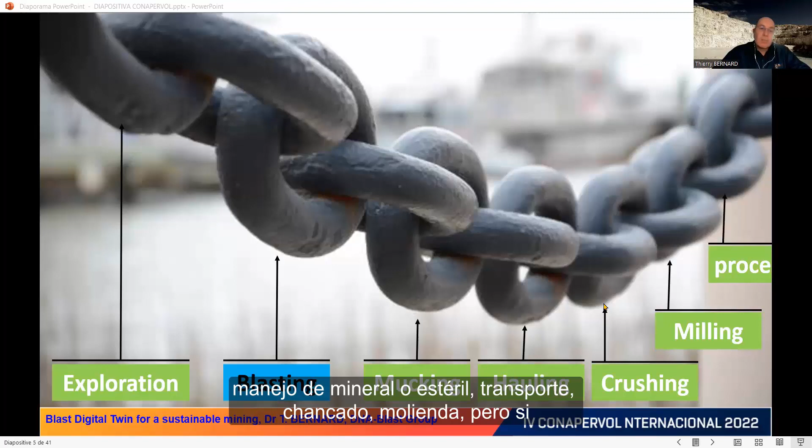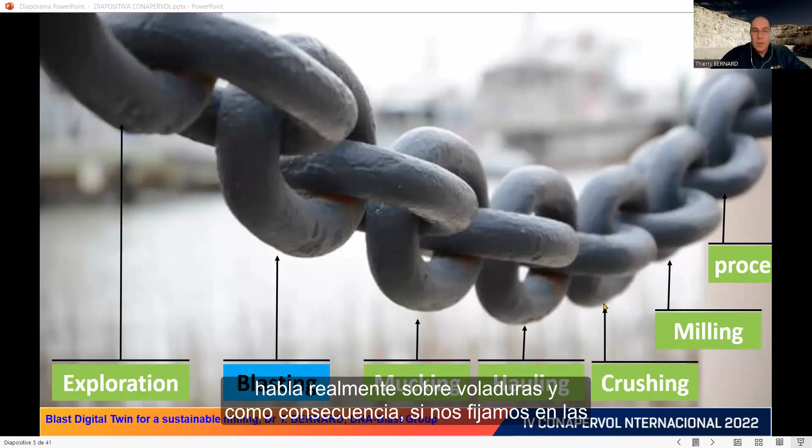If you look at the global chain, it starts from exploration, and then you've got mucking, hauling, crushing, milling, processing. But if you look at blasting, that is the first link of the chain. Nobody really speaks about blasting, and consequently, if we look at the trends, there's no reason the trends will not be the same for the blasting industry. It has to be sustainable and supported by digital technology and automation.

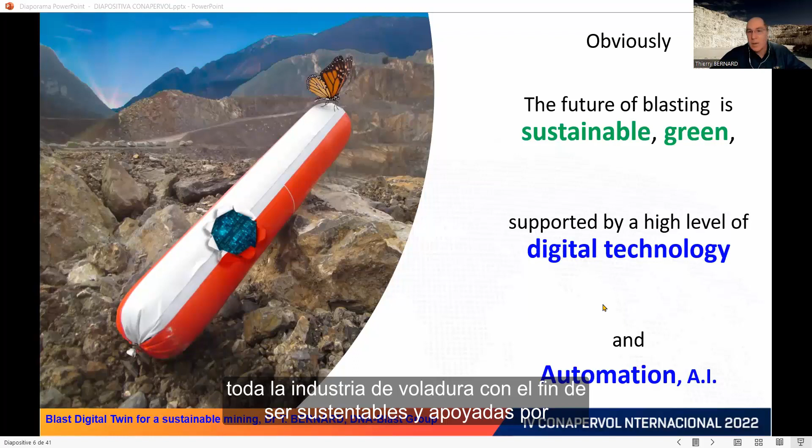If you look at blasting, the main goal of blasting is to crush the rock. But we also produce some vibration, noises, dust, fumes, sometimes flyrock, or sometimes we waste some ore body. And there's a big challenge if you look at blasting and sustainability. One of the big challenges is the waste to value challenge.

That means we have to get value from this waste effect. That is a big challenge, in fact. We're not really going to create value from that. We're going to minimize the loss of value that is the consequence of vibration or whatever, flyrock or losing some ore body. To do that, we can use some digital tools, and one of the tools is the digital twin.

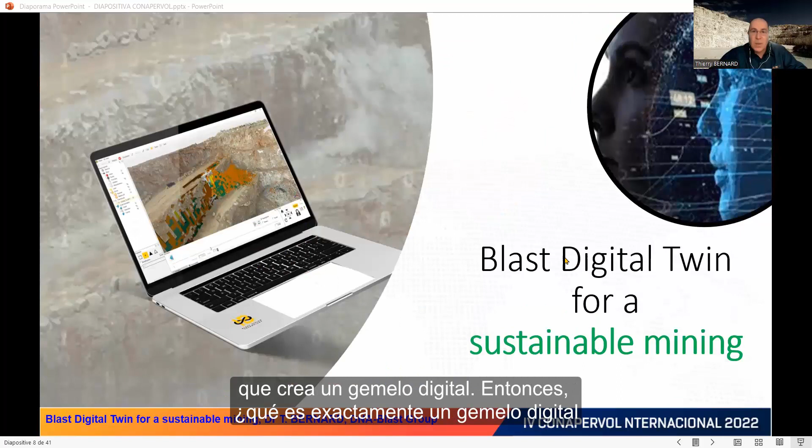So what exactly is a digital twin and a blast digital twin? A digital twin is something that is more than a simulation. It's an emulation. It's a digital replica of an object or a process, and it's connected to the real world.

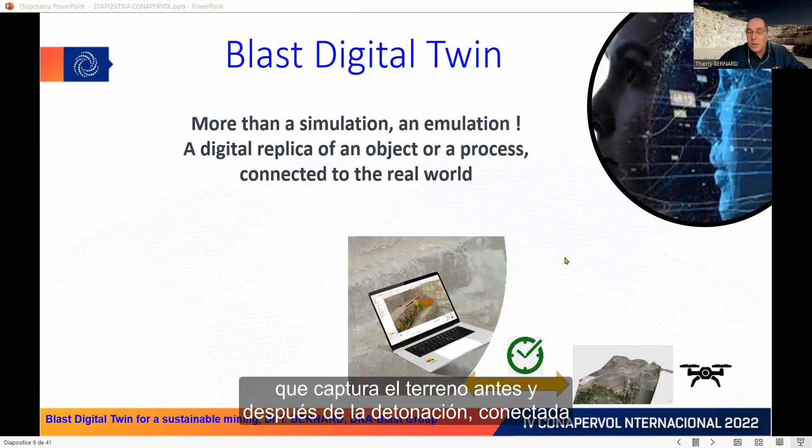Connected to the real world for blasting means, for example, it's connected to the drone to capture the terrain before and after the blast. It's connected to the drills to capture the geology, especially the UCS using measurement while drilling, and also the hole location using GPS. It's also connected to many sensors such as seismographs or microphones, and after the blast to a fragmentation monitoring system, for example, to assess the fragmentation.

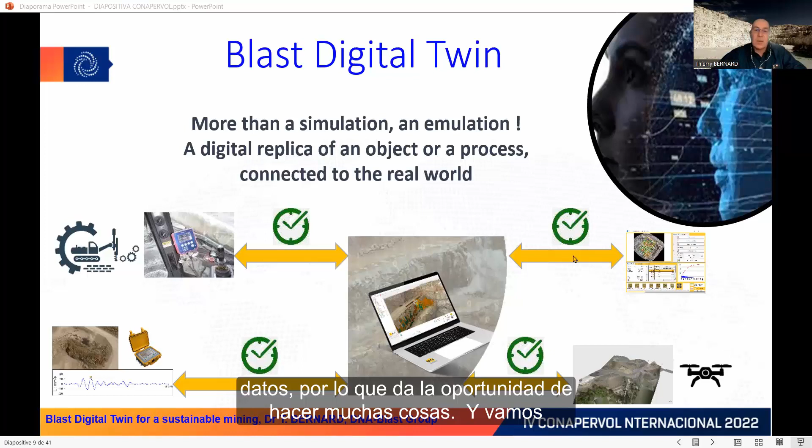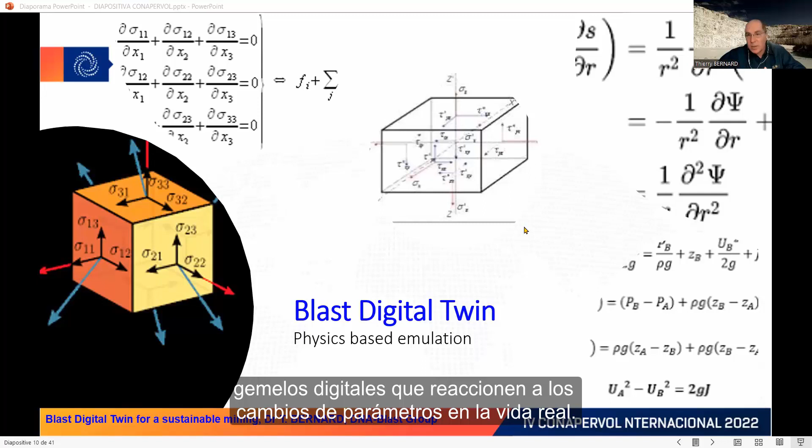The main idea is that the simulation tool becomes an emulation tool, because when it's connected to the real world, it adjusts itself permanently according to the flow of real data. So it gives the opportunity to do a lot of things, and we're going to see what we can do with that. The first thing is, because it's based on physics, the digital twin reacts to changes of parameters in real life.

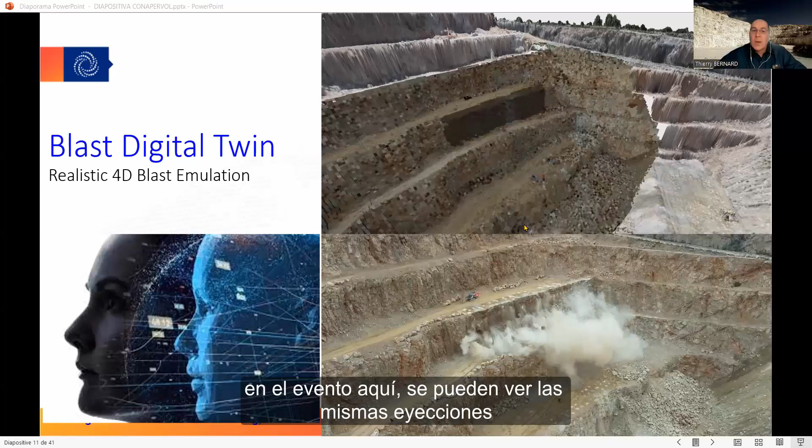Here is an example of the digital twin running: on the top you've got the emulation, and on the bottom view you've got the video. When you play it again, you can see it's very, very similar. It's really duplicating what is happening in the real world. Even here, you're going to see there are some ejections.

If you look closely at this simulation, you can see different types of rock sizes that simulate the fragmentation. So you get the small size, the mid size and the boulders, and when it's color coded, you have a better view. And if you have a close view on the video and look at where the boulders are, you're going to see more or less the same thing. There it is.

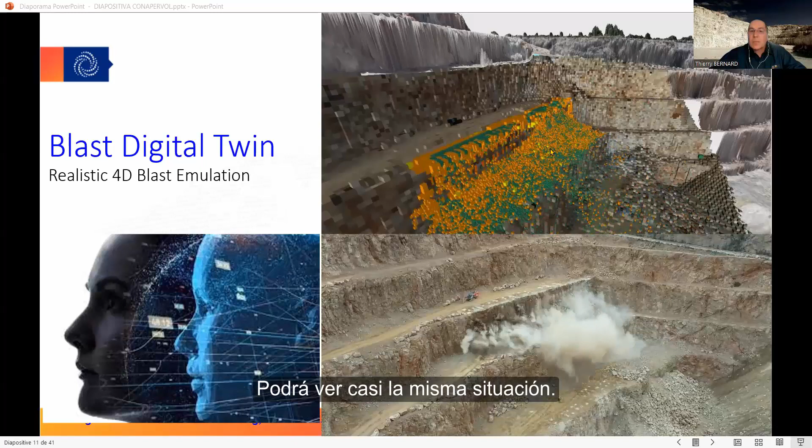Then, if you look at a larger window, here you can see on the side you've got a house, and if you run the emulation once again and you color code the ground vibration, you're going to see how the vibrations affect the house. And if you zoom on the model, you also see the movement at the same time as you get the vibration.

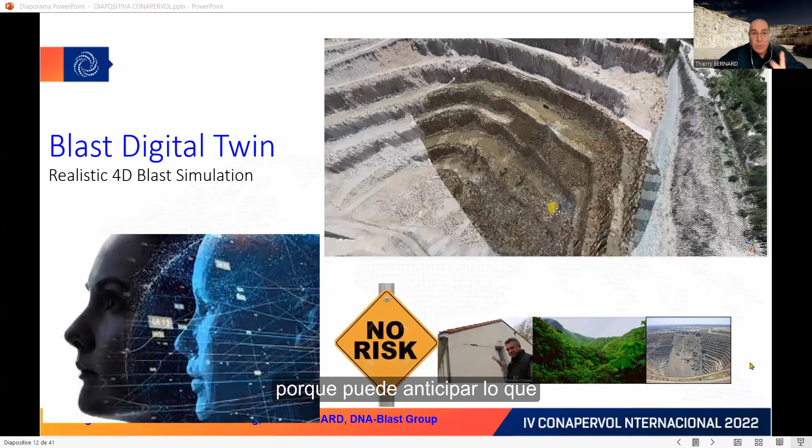The idea is that you're going to use this simulation that is converted to emulation with the real data, and when it's really duplicating the real world, you've got the ability to manage some risk, some environmental or social risk, looking, for example, at biodiversity. We're going to see an example later on, or some geotechnical risk, like the big failure that you can have either in open pit or underground. And the idea is to move from risk to no risk, because you can anticipate what is going to happen.

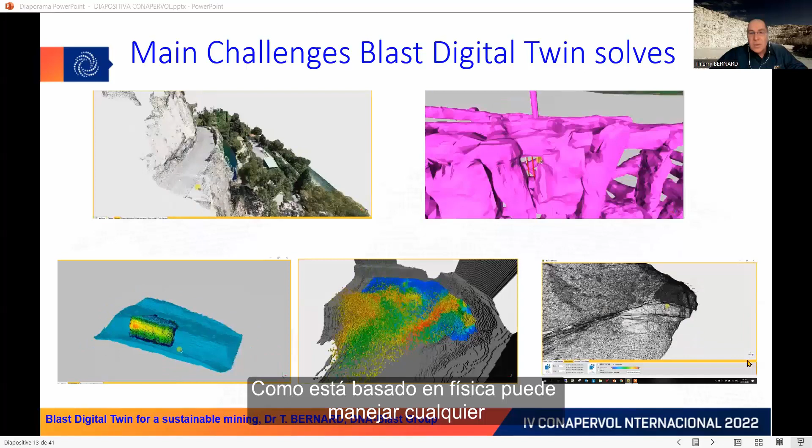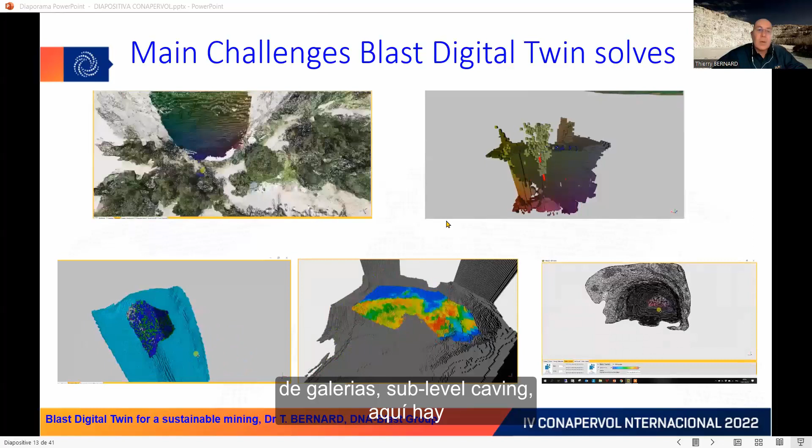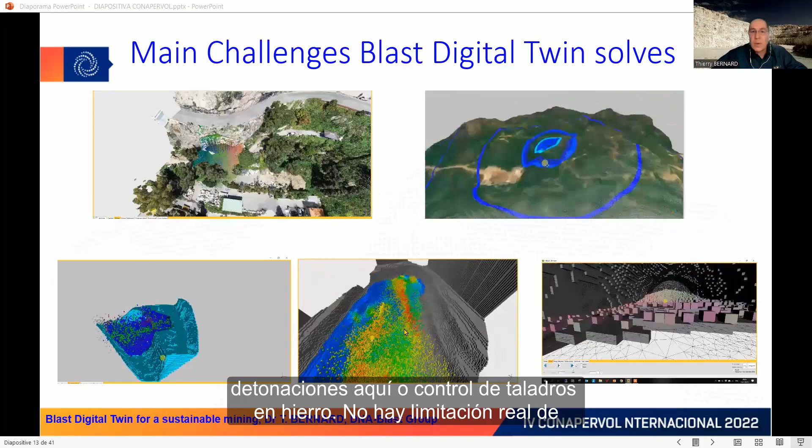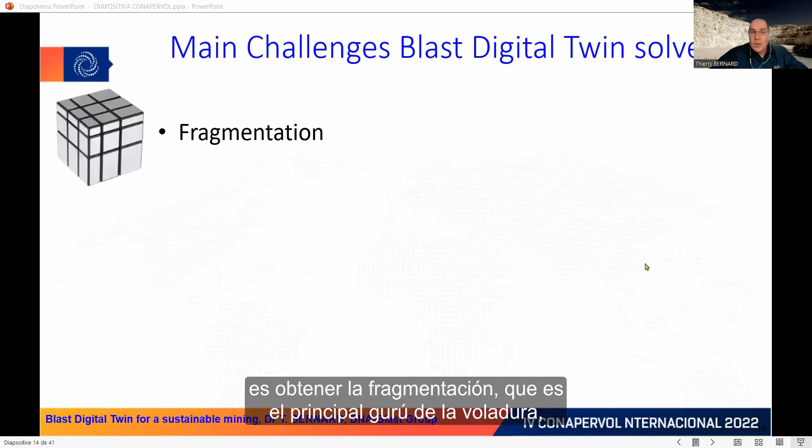The main challenges that the blast digital twin solves: you get fragmentation, which is the main goal of the blast. Vibration, fly rock, cast. You get ore grade control, damage, and very important today, carbon footprint. We have seen that in the future of mining, we need to take care of sustainability. And taking care of sustainability, one big component today is the carbon footprint that we have to control or even reduce. And with the digital twin, we're going to be able to deal with that also.

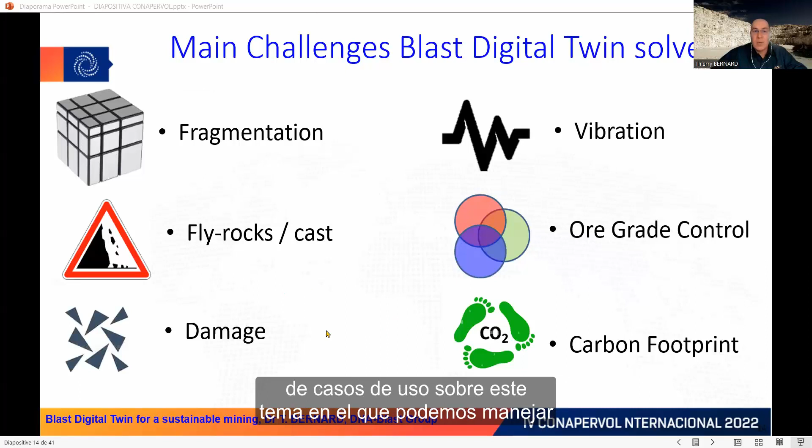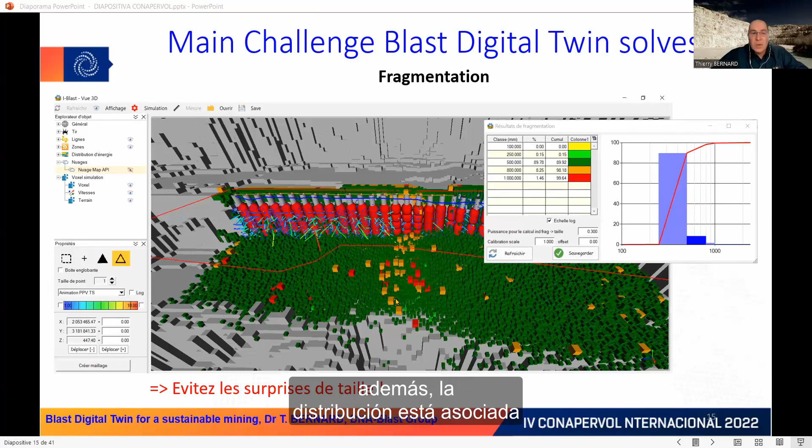But let's have a look at a few examples, use cases about these different topics that we can manage with the digital twin. The first one, for example, is fragmentation. If I come back to the emulation I showed you, you can see the muck pile with the different block sizes. Here the red ones are the boulders, and the yellow and the green are the small particle sizes. And you've got also the distribution that is associated with that.

Now, if you take an example like this one, on the left side here you've got the simulation that has been done. And then after the blast, you have the final muck pile that is surveyed by a drone, and as soon as the drone finishes the survey, it pushes the result to the digital twin, so we can use it to calibrate the digital twin, and in that case it's very well calibrated, you can see it. And if you zoom on it, you see how close the predicted or emulated muck pile is versus the measured muck pile after the blast. You can even look here where you've got some big boulders on the muck pile, and here you've got a range of boulders predicted also by the emulation.

So as soon as the digital twin is calibrated, any configuration will predict the fragmentation and help us to manage it. So then you can use it as a predictive tool to do the optimization. If you're not happy with the result, you can change the parameters in order to get a result that is acceptable for you.

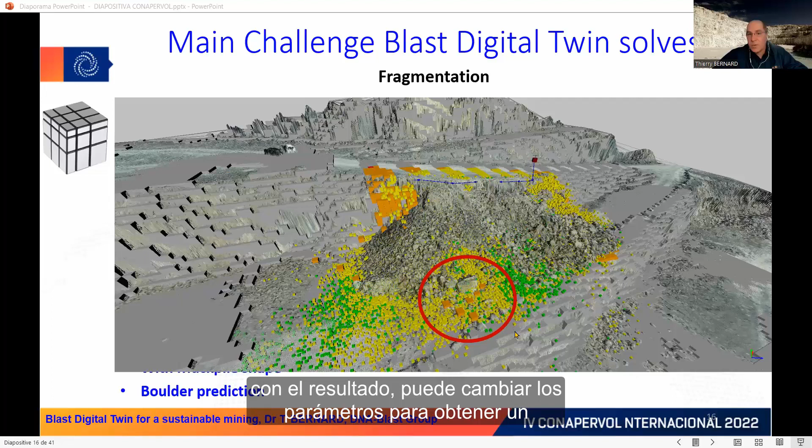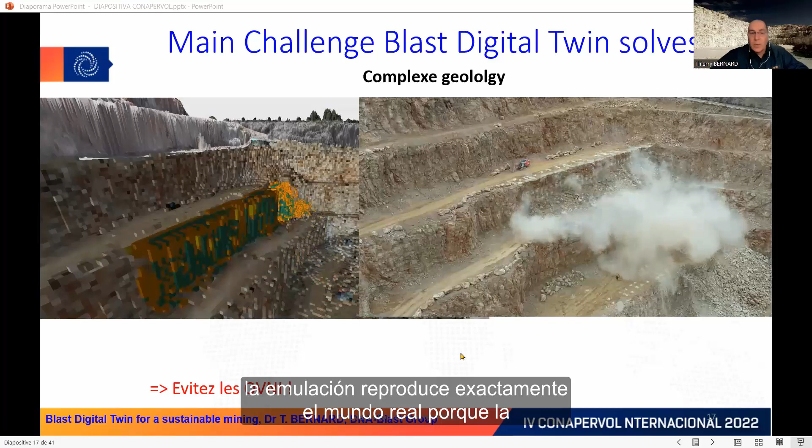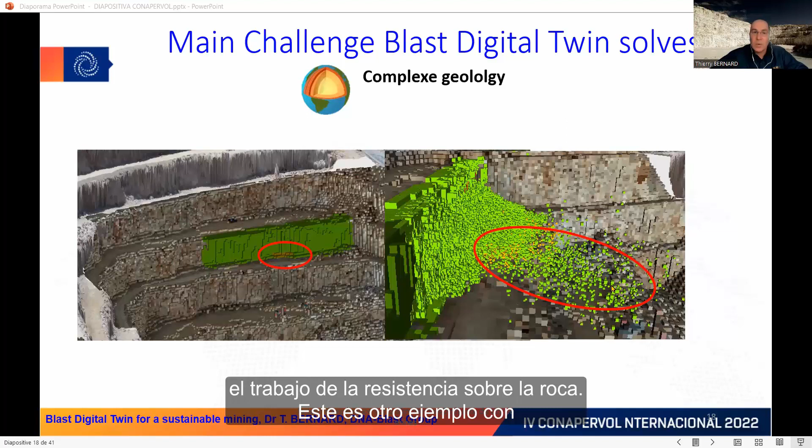Here we come back to the first video, and we're dealing with complex geology. Just to show you this ejection that you have seen on the video, if you look here, you're going to see the ejection here and here. The emulation really replicates the real world because the drilling machine can report in real time that here at the bottom you've got a layer of clay. It is a soft rock, and the measurement while drilling reported very low UCS. So when it's incorporated into the model, you can see that here you've got the ejections, and this clay is in brown. You see the brown particles flowing. Of course, some rock around is flying too, but that's why you've got this accurate prediction, because the measurement while drilling reported the real rock strength.

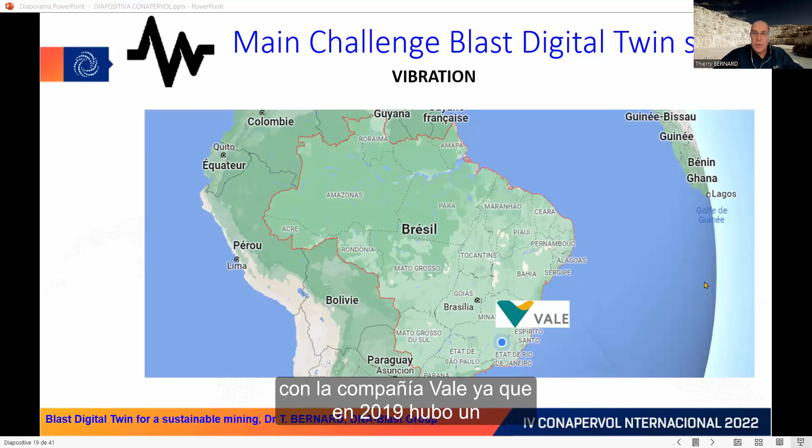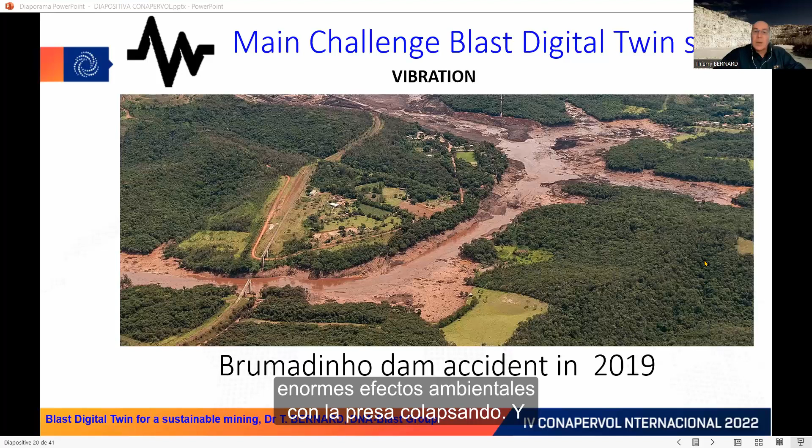Now, this is another example about vibration. This example is based in Brazil with the Vale company. And you know that in 2019, there was a significant accident where a dam collapsed, and it was a big accident. There were people killed, and also some huge environmental effects with this tailings dam collapsing. And the blasting operation was stopped for more than 1 year. And then to restart the operation, they had some constraints about the dams around the pit.

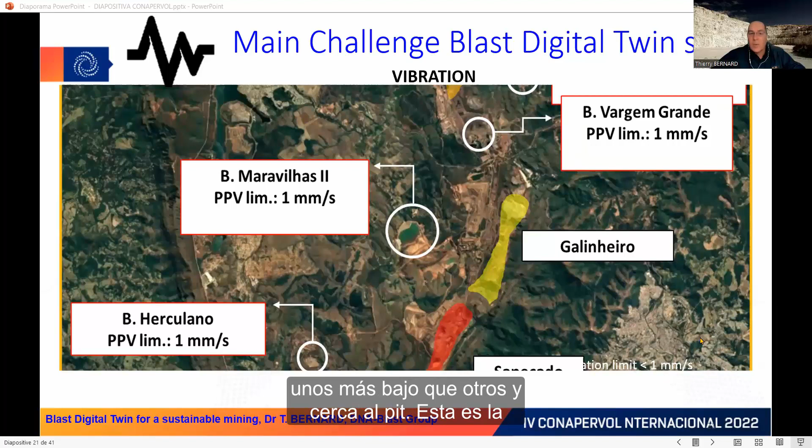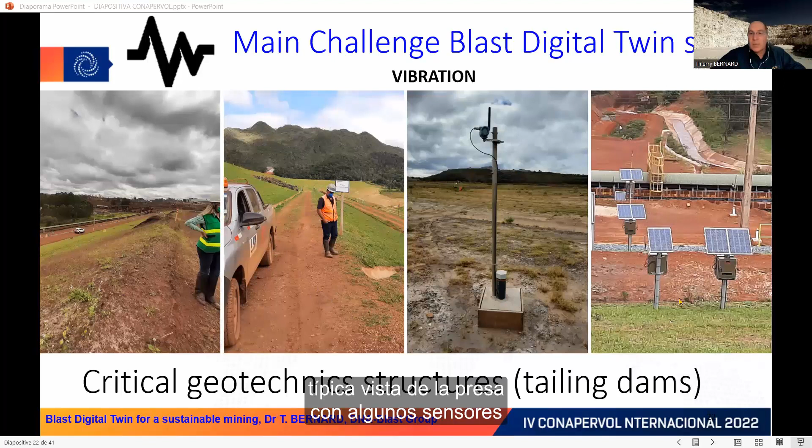And you get the pit here, and there are some high levels of constraints, and sometimes lower than 1 millimeter per second. And it's close to the pit. This is a typical view of the dam. It's an earth dam with some seismic sensors or piezoelectric sensors. But there's also some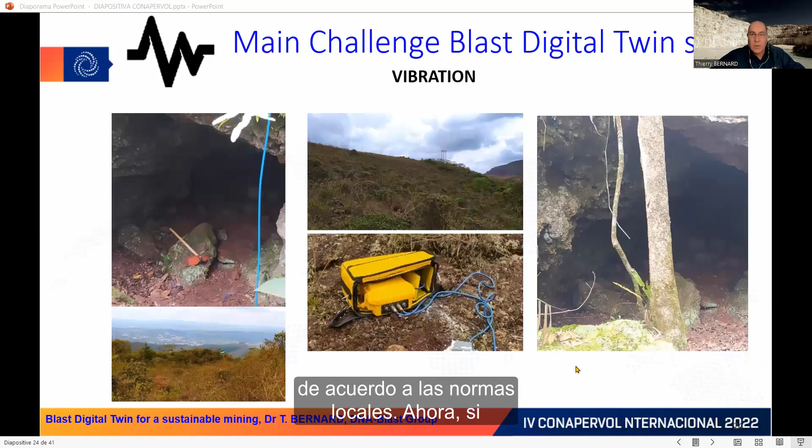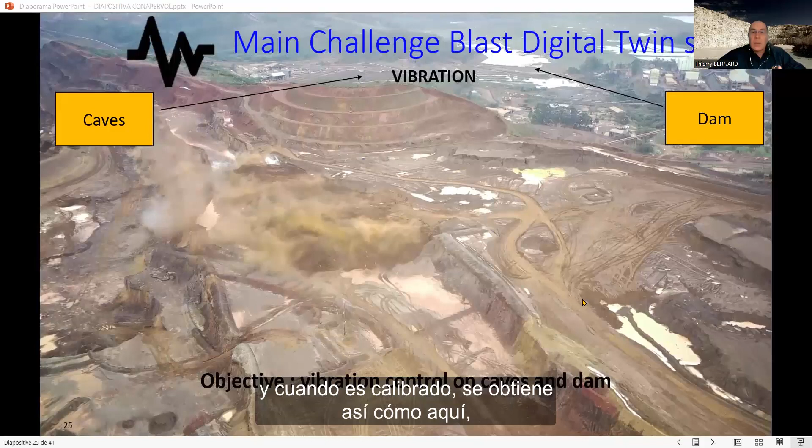And now if you have a global view of a typical mine blast here, you get a cave here, very close to the blast, and you get the dam in the background, and you have to control the vibration on both. If you use the digital twin, you calibrate it on site, and when it's calibrated, you've got something like that where you can see the movement simulation that shows you that the model is well calibrated with the real data, the field data.

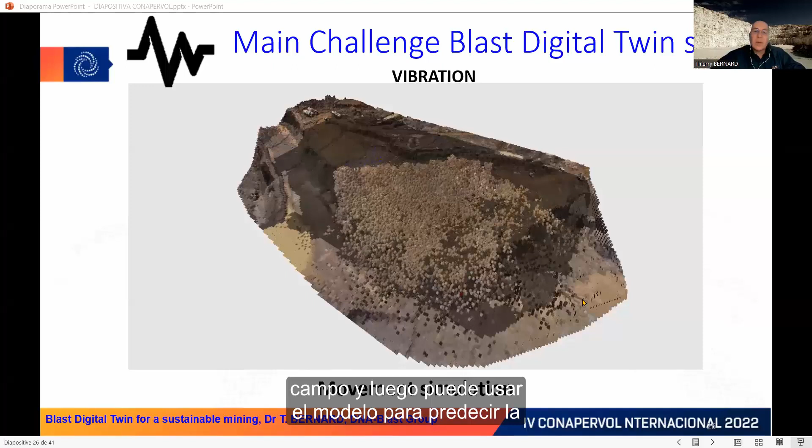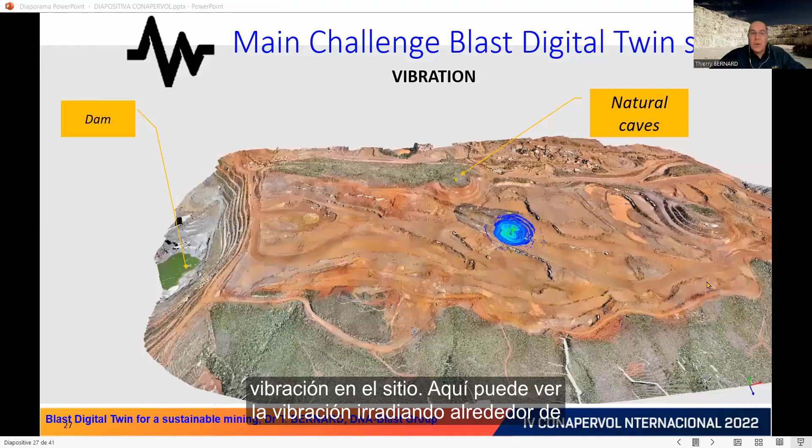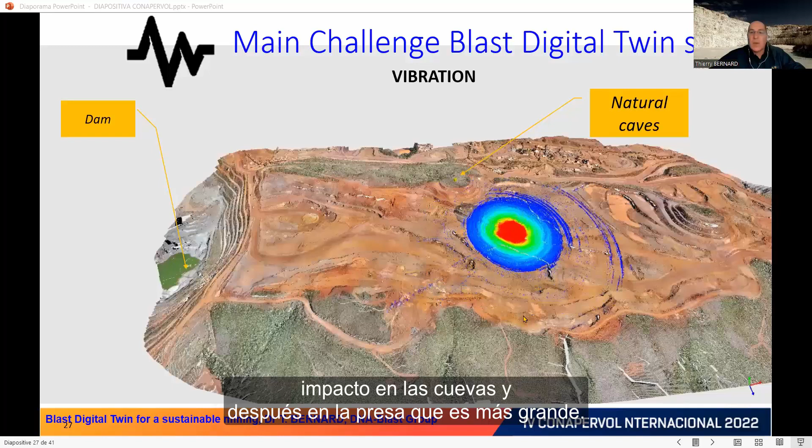And then you can use the model to predict the vibration on site. And here you see the vibration radiating around the blast, propagating in the environment. So you can see the impact either on the caves or after on the dam on a larger scale. And this is, for example, here on a much larger scale.

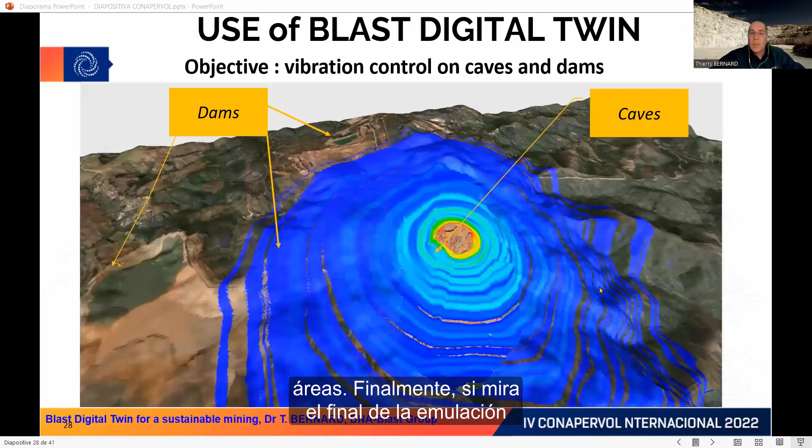So we've got a tool to predict the vibration before the blast happens, and we can also prove that you can have the vibration under control on all the areas. Finally, if you look at the end of the simulation, you've got the vibration on the cave here and on the dam, and you can check that the vibrations are in line with what you expected.

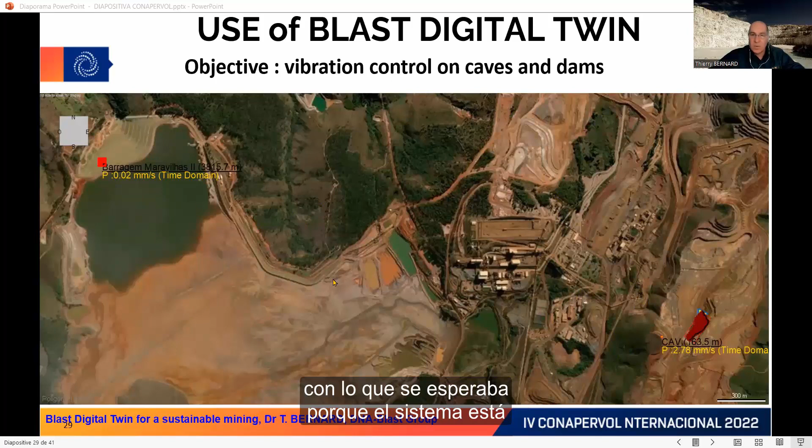And because the system is predicting, it's really duplicating the real world. It's also predicting the full waveform of the vibration everywhere, so you can check the frequency and everything. Finally, it helps Vale to resume the blasting operation close to the tailings dam. And this is what the client says: they were happy to use this digital twin to restart their operation.

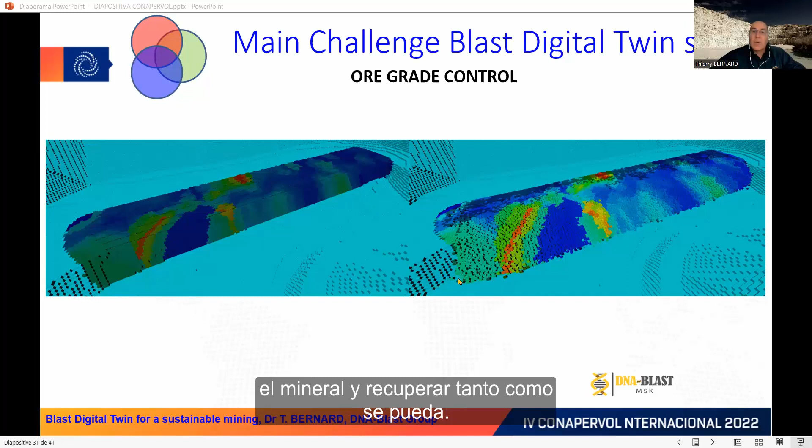Okay, there's another use case; we're going to look at the ore grade control. So ore grade control is a key thing in the mining industry. We have to recover the ore and recover as much as we can. In this example, you've got a video of the blast, and on the right side, you've got the simulation of the blast that has been calibrated in that case.

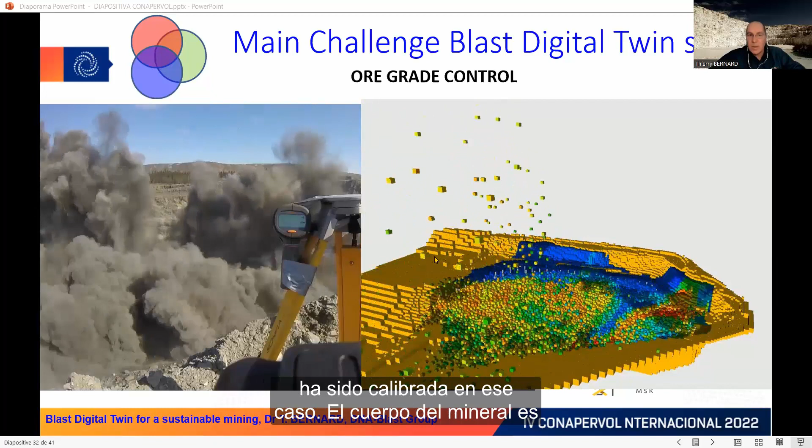And the ore body is color-coded with the ore grade. This is iron ore. And then when it's calibrated like this, you see that the final muck pile is very close to the real one. Then you can start doing optimization about ore grade control.

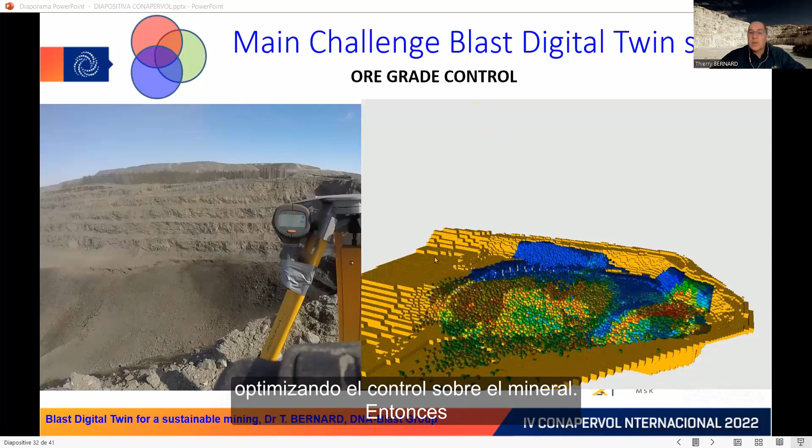So the principle that was used here for that mine is to explore 3 scenarios. Basically, in that case, they use the same timing. You see the timing is color-coded, so you see initiation, it's a V shape, and it's progressing around the V shape. But they decided to check different patterns. So here you've got a 6x5 with 1 meter of stemming, 6x5 with 1.5 meter and a 5x4. And also different diameters. So 3 different scenarios.

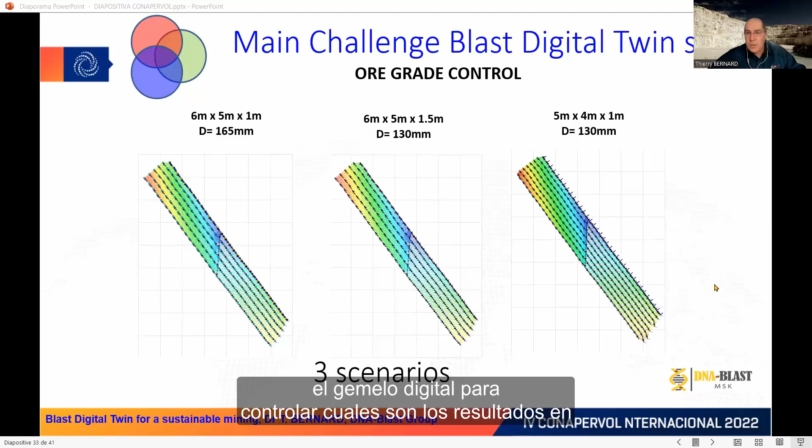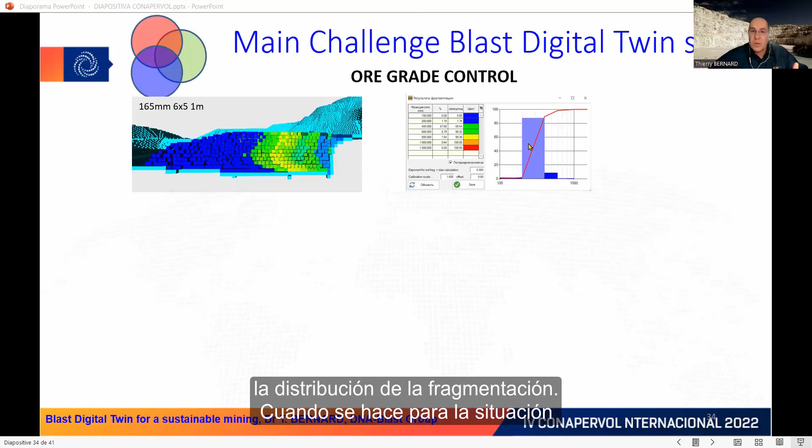And the idea is to say, okay, let's use the digital twin and let's check what are the results in the 3 different scenarios. So for each scenario, you're going to predict the movement. And if you superimpose the block model, that's the case here, you see the displacement if you do a cross-section of the muck pile. And you've got also the fragmentation distribution here, when you do it for scenario number 2 and for scenario number 3. So 3 different scenarios, 3 different results.

You can see here that the movement is very different from scenario to scenario, even if the timing is the same. So depending on the pattern, and then also they can check the fragmentation. So at the same time, they've got a view of the movement and what is going to be the more suitable for them. And they've got also a view of the fragmentation that is depending on the pattern.

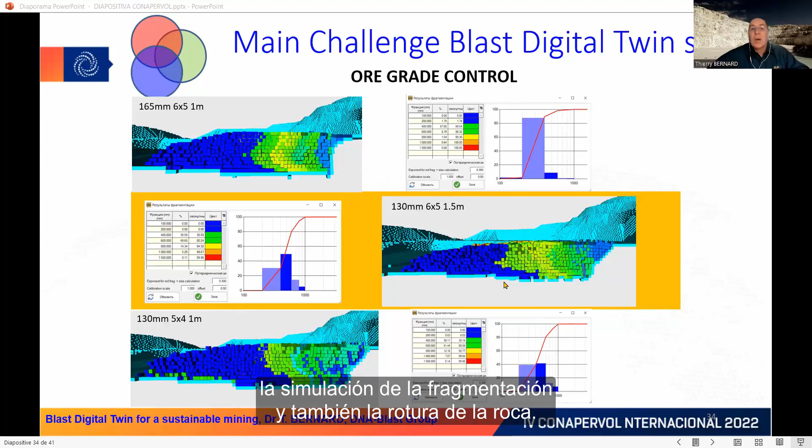You can also have a look at the damage, the back break. And here you see there's a different back break on the different scenarios. So you have the movement that will create the dilution, and the fragmentation, and also the back break.

And you can also add the carbon footprint. That was not done at that time, but we did it later on just to see the different impact of the carbon footprint. So at the end of the day, you've got three simulations based on a calibrated digital twin, and then you can select the one that is the most compatible with what you're looking for.

In that case, what was done is that there were some economics done for each scenario. Let's say looking at how much ore we can collect depending on the movement, and also with a ratio based on the cost that is based on the pattern. So it's changing the powder factor and the drilling cost.

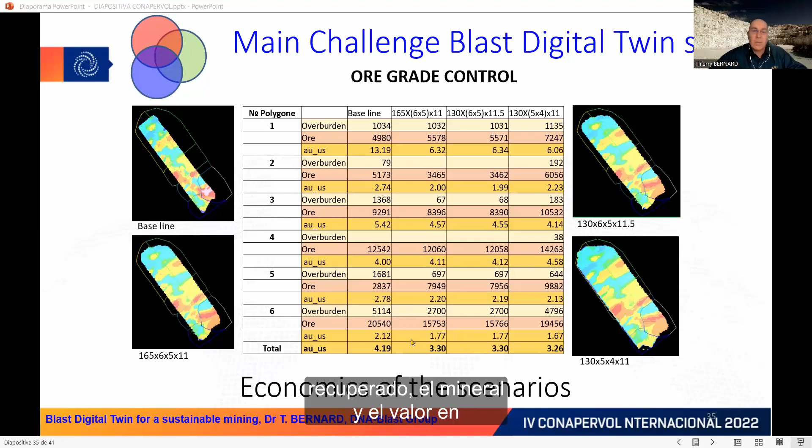So you've got the baseline, that is the standard blast that they used to do, and then you get the three different scenarios, and for each there's a calculation about the overburden, or the low grade, the ore that is recovered, and the value in dollars. So then you can draw some graph like this with the different scenarios.

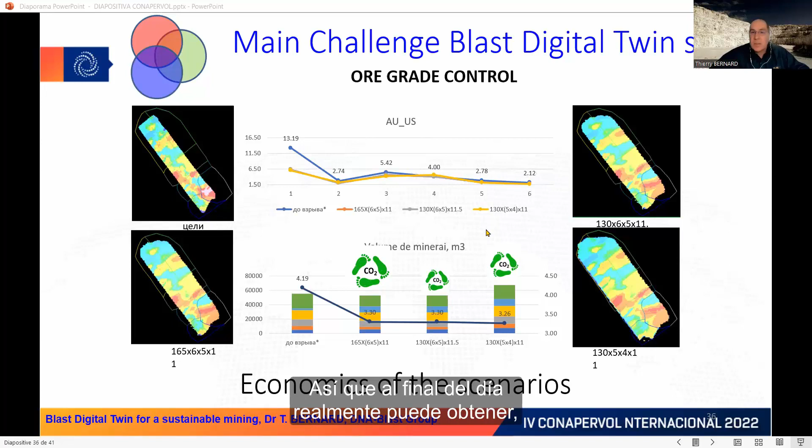And you can also add the carbon footprint on top. If you add the carbon footprint on top, then you have a view of the impact. So you see here, that's the least impact on the carbon footprint, but it's not the highest value. For the highest value, you put a higher carbon footprint in that case. So at the end of the day, you can really deal with that, and the digital twin helps you to do some prediction and to manage that.

So we can conclude by saying that we can win the sustainable challenge in blasting, try to make blasting sustainable. We use a digital twin. We've got 4D emulation that shows you the movement, the fragmentation, and the vibration, and then you can manage your risk. Try to move to no risk, because you can anticipate everything, and if something changes versus what was planned, you can adjust it.

Like, imagine that your drill is not going to drill at the right place because the rock is not what you're expecting, is not that competent. The digital twin will automatically adjust the simulation and the emulation, and you can see the impact.

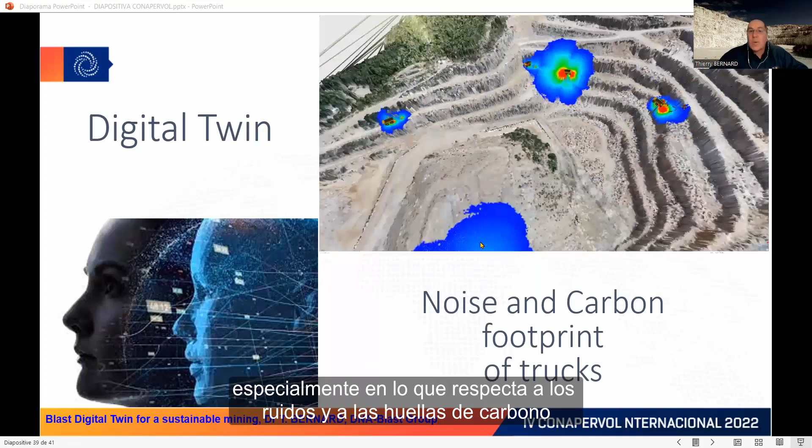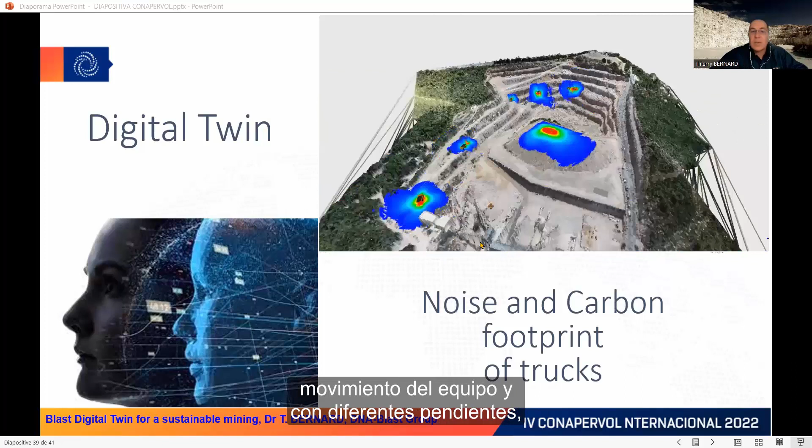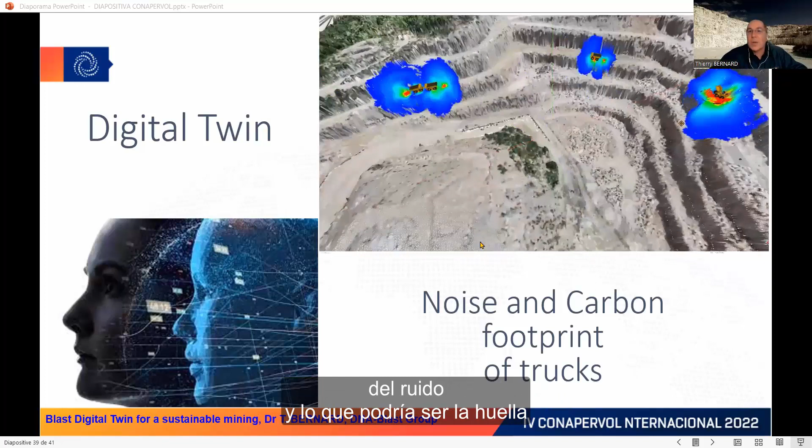This is another view of what we can do with the digital twin. Here, we're using the digital twin to see what is happening with the trucks and the heavy equipment on site, especially as regards the noise or the carbon footprint. So it also helps to control these kinds of things, depending on the movement of the equipment, different slopes and how the trucks are loaded. You've got a different view of the impact, either the noise or the carbon footprint if you just change the scale, and it's really showing you how it impacts the pit.

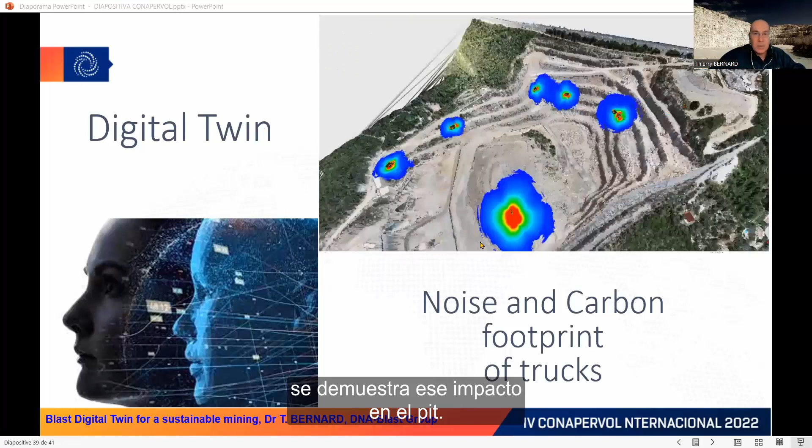I hope I could give you a good feel of this new digital technology, the Blast Digital Twin, and how it can help for sustainability. Once again, it can help for the environmental impact, basically the vibration and the air blast, either on the houses or on the biodiversity. It can really help to maximize the recovery of ore grade, and here we are really addressing the waste to value change.

Carbon footprint, decarbonization with improving the fragmentation, because fragmentation is what uses the most energy if you do it in the crushing or the milling plant. So if you can improve the fragmentation by blasting, you're going to really improve your carbon footprint. And also all the risk management, especially on geotechnical failure, either in open pit or underground.